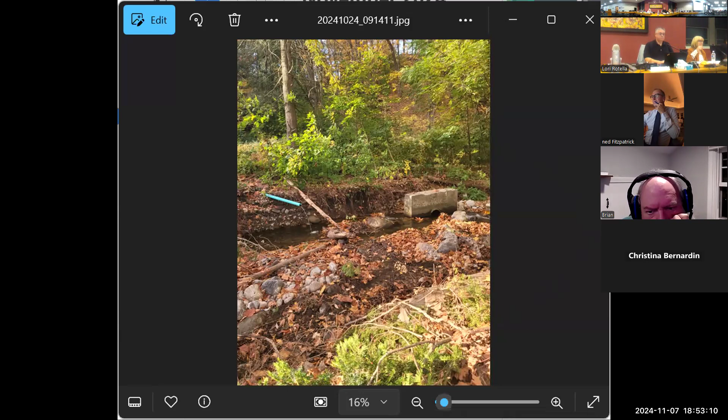Item 6 is correspondence, and it doesn't look like we really - well, we have a couple of letters, but that's it - those will be marked down.

Item 7, the WIP report: application IW 20-08, commercial development at 0 Prospect Street, applicant is Magdi Babawi on Squadros. I don't believe he's back in the country yet. Okay, we'll just keep that on the agenda.

Application IWAA 23-03 for addition located at 707-709 Rubber Avenue, applicant is Dion Xavier. Talked to him today, they're still working on the inside.

They have electrical and insulation to do, and they also need to redo some of the outside stairs and replace some of the siding. So they're keeping the silt fence up. Okay, we'll just keep that on.

Application IW 2307 for a pedestrian walkway over Fulling Mill Brook, located at 0 Prospect Street, account 060-7050, and 47 Prospect Street. The applicant is P&M Property Management. No change yet, I've talked to him several times a month to ask when he'll do the work. He didn't give an estimate or a date, so I'll try to get one, and we can wait on the agenda if we don't need it yet.

Item D, commission discussion and decision regarding application IW 2404 for a self-reported violation of permit IW 1408, located at 1419 New Haven Road. The applicant is Kyle Pustula and Associated Consulting Engineers.

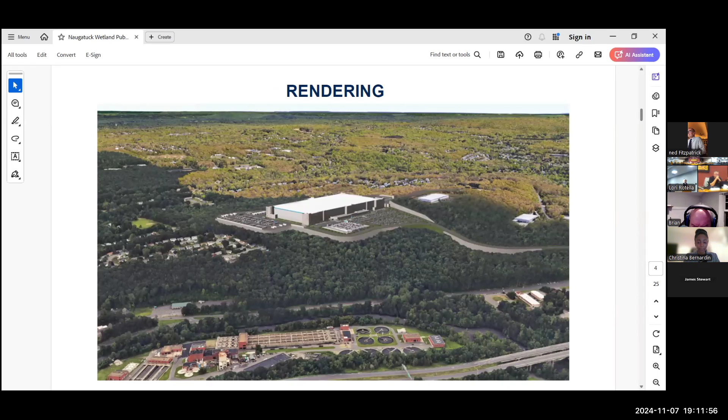So quick rendering for those who haven't seen it in previous meetings. This is just a rendered view, bird's eye view of what the building will look like once it is constructed and where it will kind of sit in the overall area. Next slide. So what is the building?

The building is a retail distribution facility. We consider it, and Amazon considers it, a first mile distribution facility. First mile is basically the first time product comes into a building and gets stored. So if any of you are sellers of toothpaste, you ship your toothpaste to Amazon, Amazon will store it inside this warehouse on floors 2 through 5. Then when somebody else in this room buys that toothpaste, they'll be picked, packed, and sent out of this facility to another facility via zip code.

And that will be more of a last mile or middle mile facility. Those can be another Amazon facility, similar to the one in New Haven, where you see the little trucks running around your neighborhoods delivering actual Amazon packages. It could be USPS, it could be FedEx. So there's many ways they could get their package, but this is the first mile - storage of all of their products that they sell.

This is a 24/7 operation, 365. They run 2 or 3 shifts, depending on what they decide when operations gets into the building. The building itself is a 650,000 square foot footprint on the main floor, and then there's floors 2 through 5, which is where all the goods are stored. The main floor is all packaging, shipping, picking, and then operations for the building.

The total square footage is a little over 3.2 million square feet. The building is primarily constructed of insulated metal panel at the top, which is color coded to Amazon's liking, along with insulated metal panels at the top, and precast concrete panels for the remainder of the building. Next slide, please.

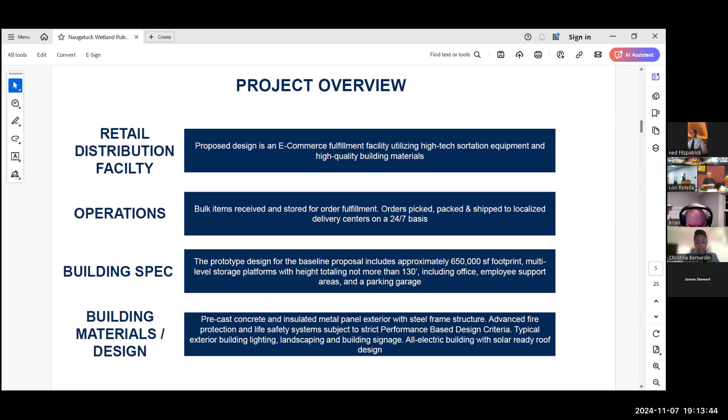Just some high level project benefits. Obviously, this is a huge building. We're developing a very large piece of land. Obviously, the building is readily assessed over $150 million in many of the municipalities we built this in. So that is an increase, obviously, to the current tax base and current use of the property.

Permanent jobs - like I said, it's a 365 facility, 24/7. There are estimated to be between 500 and 1,000 permanent jobs within the facility once they are open and running kind of full steam. We generally believe it's a little more, but like to be conservative in what we put out into the public forum.

Construction jobs, have a lot of union fellows in the building tonight. Thank you for your attendance and support. As many of these big jobs, a lot of union participation on all these buildings.

My job up in Rhode Island was 90 some odd percent union, and we had probably 70 to 80% union in Charlton, Mass. So a lot of union participation, a lot of construction jobs, 300 plus construction jobs during the project, and on a peak day in the middle of the project when we're running full bore, there'll be 400 to 500 people on site every day working.

It'll be hard to notice when you're in the building or when you're on the site, but it's a tremendous amount of people. Other benefits, obviously, is all of the construction workers, all of the subs to the subs, are all in your community and going to your mom and pop shops, eating at your pizzerias, going to the gas stations. So other avenues outside of the construction field obviously get helped and see economic impact in the positive.

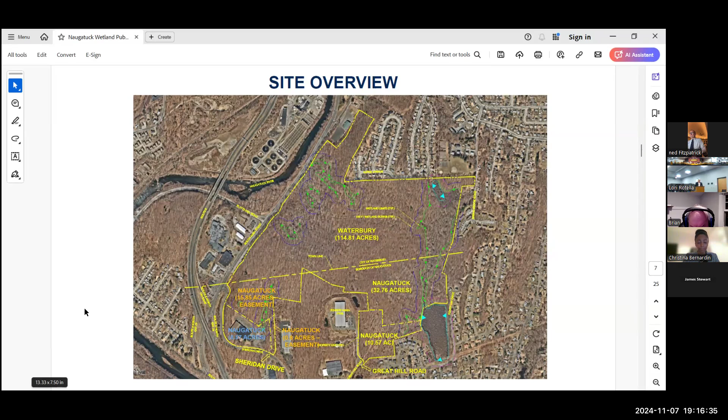Go to the next slide, please. If you've had a chance to review any of the materials that we submitted, this is the overall site plan. It expands on some of the commentary you've heard about the building. It is supported with surface parking as well as a parking deck.

The parking deck is fully located in Waterbury, and about 100 of the 1,000 parking spaces are located south of the line in the borough. Two driveways on the map: one on the left-hand side connects to Sheridan, and one on the right-hand side connects to Great Hill Road.

Dean Gustafson, with All Points, will walk you through the various wetlands that exist on the property and surround us. But I'll take you through some of the engineering on the grand scale of the project and how we came to the design that we concluded with and have submitted as part of the application.

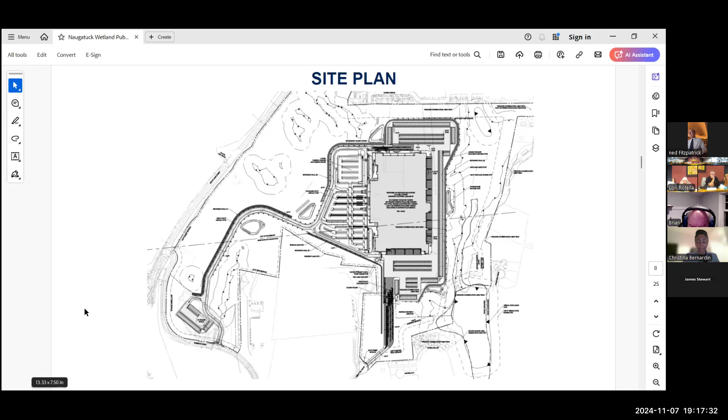Next slide, please. So a big part of what we've spent a lot of time on to date, in addition to the layout, orientation of the building, design of retaining walls, grading, and some of the other materials in the package, is stormwater management—one of the key components we spend a lot of time on as part of the inland wetland application.

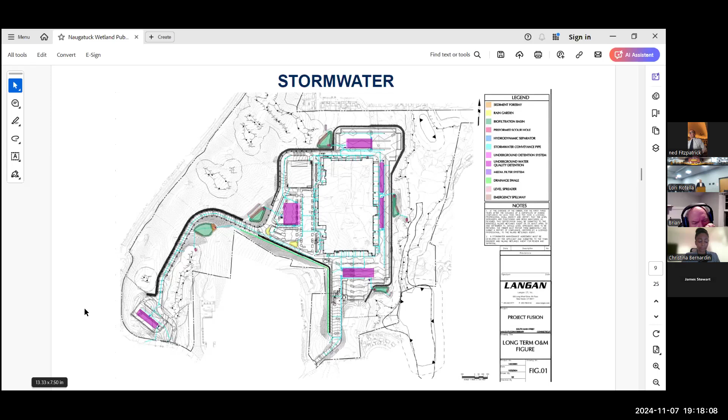Next slide, please. And I'll highlight those in a treatment train, because that's really how these systems work on site. It isn't a singular component that captures and treats stormwater. There are a number of features that move in sequential order from the drop of rainfall to the actual discharge off site.

So the first step in that stormwater management is catch basins. Those catch basins convey water through a pipe network. The first stop in renovating and cleaning that stormwater is a hydrodynamic separator, basically a swirl chamber that allows materials that float to be trapped at the top, and heavy materials like sand and dirt and rocks to fall out of the water and be captured in the chamber.

As that water leaves that initial round of treatment, it goes to an underground detention system where we're actually able to meter the rate at which water leaves the site and leaves the individual components. This is kind of unique, and really a function of the new Connecticut Stormwater Manual, which I believe went live in July of 2024—we have filter media that will actually filter the water as it leaves that underground detention system before it continues to move downstream.

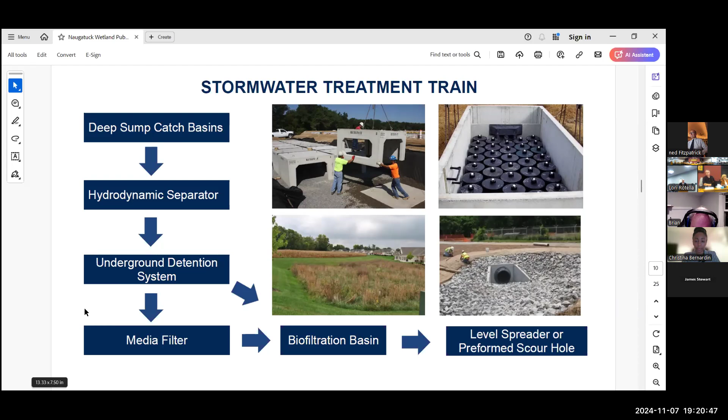One thing we are asking for as part of the application is a waiver to one component of the Connecticut Stormwater Manual. If you've had a chance to read the peer review letter by Tighe & Bond, the first bullet here was raised and discussed, and my office and your peer reviewer went back and forth on this. I thought it was important to bring up while we're talking about stormwater.

The new Connecticut Stormwater Manual has 4 standards that they look for as part of a development project. One is runoff volume and pollution reduction. All of those things I talked about on the previous slide regarding detention, the filters, the basins, that's how we meet that first standard.

The second standard is stormwater runoff quantity control, which is this slide. It has 6 or 7 components in it. The one with the X next to it at the top is the one we're not able to meet fully, and we have a number of reasons why. Every other item under this standard, we're able to meet: 10-year control, 100-year control, beyond 100-year control, conveyance protection, emergency outlet sizing. We're able to hit all those, but that first one, as part of this submission, we are requesting a waiver.

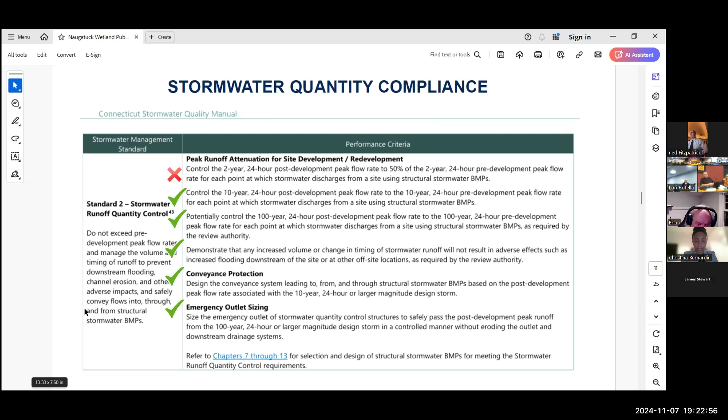On the next slide, I'll highlight it and give you a little background. The standard we're asking for a waiver on is the new stormwater manual requirement that 2-year storm events be reduced to 50% of the pre-development rate. A normal standard in most design criteria is that you match or reduce what happens existing with your proposed project. This asterisk we're asking about is a new requirement for taking the 2-year storm and actually cutting it in half.

That standard did exist in the prior version of the Connecticut Stormwater Manual, but it was really focused on sites where you had a direct discharge to a stream, and they wanted development projects to try and minimize the flashiness and the blast of water that would come through a stream in some smaller storms. That's been rolled into this second standard completely.

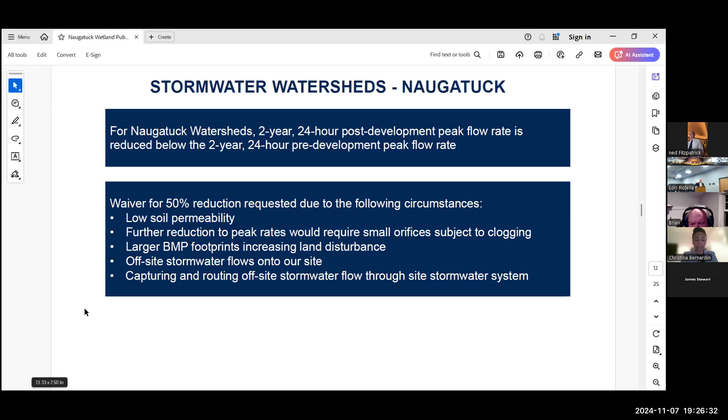This is really one of the biggest driving forces. We have about 86 acres of land in Naugatuck on the property, and this other 40 acres contributes to that stormwater management system. I wanted to flag that now—it is discussed in the peer review letter. Not sure if staff will have a chance to discuss the dialogue we've had on it, but I thought it was important to raise now and walk through some of the specifics of how we came to the conclusions we made as part of the discussion with your peer reviewer.

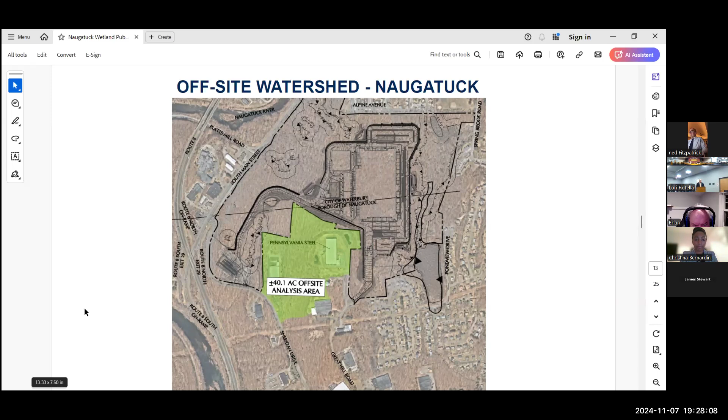Let's see, next slide please.

Another major component of the application is a soil erosion and sediment control plan. As part of the drawing set, we've included a three-phase approach: identifying appropriate measures for when work starts and clearing and earthwork begin, since day one of a construction site is very different from when it's paved and final stormwater features are complete. The first phase covers how to properly protect on- and off-site resources while initial work starts. The second phase covers when earthwork or initial clearing is done and retaining walls are being built and the site is being leveled. The third phase covers when walls are complete, paving has begun, and catch basins are installed—identifying how to modify the soil erosion and sediment control measures along that path to protect the resources.

So that first bullet is the phased soil erosion and sediment control plan, which is in your packet. The second bullet is that, in addition to everything we do locally with Naugatuck and Waterbury, because the project involves more than 5 acres of disturbance, we're required to secure a construction activities general permit from Connecticut DEEP.

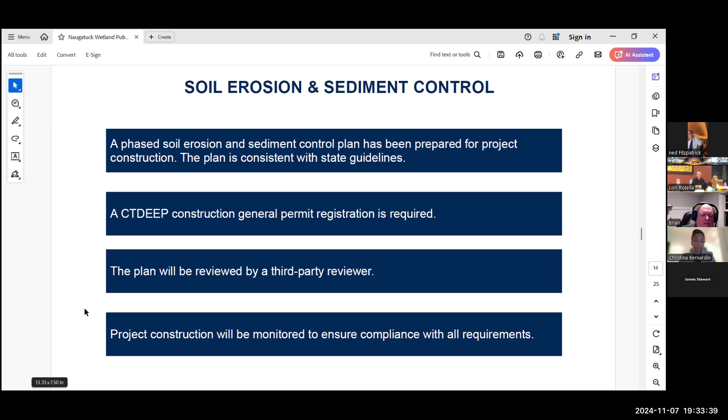Good evening, my name is Dean Gustafson. I'm a senior wetland scientist, professional soil scientist with All Points Technology, Waterford, Connecticut. Next slide please. So what I'm going to discuss tonight, all the information is contained in the wetland assessment report that's been issued as part of the wetland permit application. We'll talk about the wetlands themselves, the project's regulated activities, and our extensive mitigation plan that we're proposing to offset some of the minor regulated activities.

So on this particular slide, what we're showing here is the wetlands that we delineated back in 2022 and then updated that mapping this past spring. Those wetland areas are shown as a shaded green area, and surrounding those wetland areas is a darker green dash line that represents the 100-foot upland review area that's regulated by your commission.

There are four wetlands that are located within the borough of Naugatuck. Starting from the far western end, there's a small isolated wetland that we identify as wetland 10. Next to that one, just to the east, on the parcel identified as 191 Sheridan Drive, is a narrow linear wetland feature that drains to the south, identified as wetland 7, that drains through a culvert system underneath Sheridan Drive. And then on the far eastern end of the site is a large wetland complex identified as wetland 8/9. And at the far southern end of that wetland system...

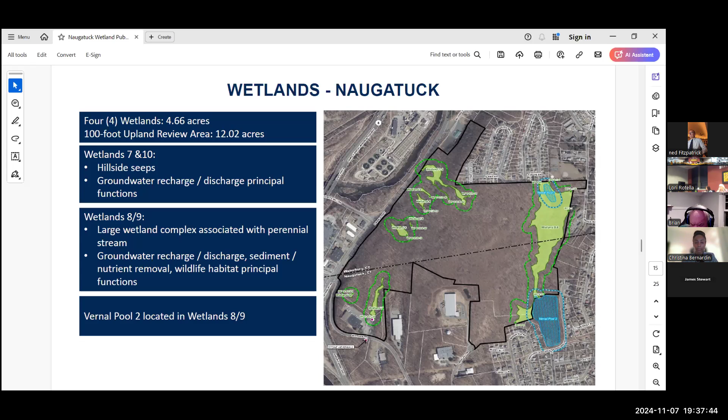I misspoke — this feature we identify as vernal pool 2. Vernal pool 1 is not located in Naugatuck to the north, in Waterbury. Next slide, please.

The property was also evaluated for state and federal listed rare species and found not to contain any threatened or endangered classified species. Through consultation with the Connecticut Department of Energy and Environmental Protection's Natural Diversity Database, it was determined there was a potential for two state-listed special concern species, with records in the vicinity but not on the actual property. As a conservative evaluation, we assessed the site for possible presence of eastern box turtle and Horace's dusky wing. For the dusky wing, we surveyed the site for host plants utilized by that species, primarily oaks, dogbane, buttonbush, and goldenrod.

The turtle evaluation survey was conducted by one of the leading herpetologist experts in the state, over a series of 3 days in June of 2022. No box turtles were identified as part of that survey work. We did identify various host plants, which are fairly common species in this type of community, the mesic and dry-mesic forest habitat, both within the proposed project limits and in extensive areas outside the project's limits of disturbance, scattered across the north, south, east, and west areas of the site that will remain unaltered.

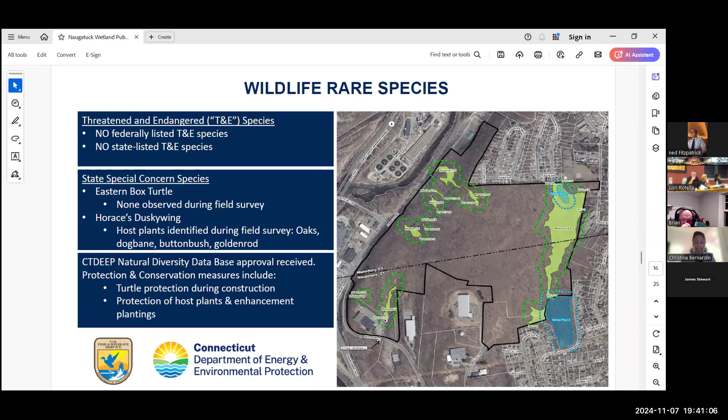We also evaluated the property for potential historic and archaeological resources through various investigations and consultations with the State Historic Preservation Office, or SHPO. A couple of different surveys were performed throughout the property, and the heritage consultant did not find any resources eligible for National Register listing. Those results and conclusions were submitted to the SHPO office for review, and SHPO agreed that the proposed project would not have an adverse effect on historic and archaeological resources. A letter to that effect is provided in Attachment E of the wetland assessment report.

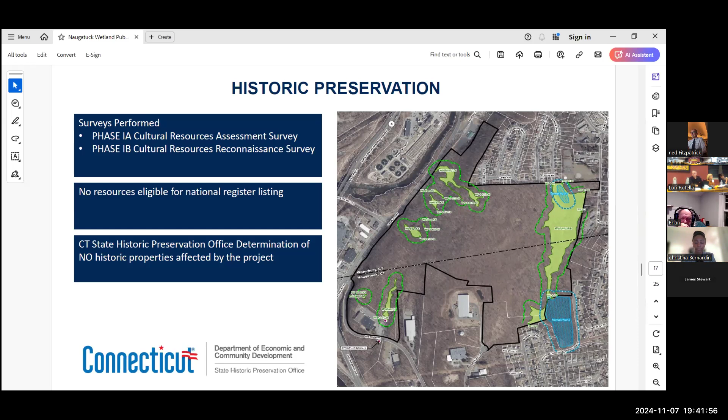The next few slides will start talking about proposed activities of the project located within the regulated areas under the purview of this commission. The proposed project has been successfully designed to avoid any wetland impacts — there are zero wetland impacts for this project. Also, encroachment into the 100-foot upland review area has been minimized through engineering controls, namely extensive use of retaining walls that limit the extent of the project's limit of disturbance.

This slide shows a total of 5 areas with regulated activities, essentially small encroachments into the upland review area: a little area just east of wetland 10; areas just north and south of wetland 7; areas at wetland 8 and 9; a small area associated with a basin; and a small area associated with a retaining wall in that location.

So what's shown on this map, those pink or red shaded areas are the areas of encroachment to the 100-foot upland review area. In total, there's a little more than 9/10 of an acre of encroachment into the upland review area. Many of those areas are on the outer limits of the upland review area. When you consider that there's a total of over 12 acres of upland review area within Naugatuck on this project, the project represents less than 8% of activity within that upland review area.

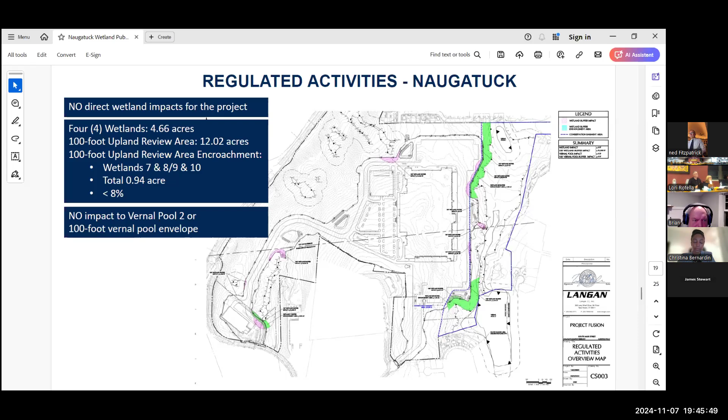We'll get into a little bit more detailed discussion of where these encroachments are into the upland review area. We'll start with wetland 10. There's a small strip right here - this line represents limit of disturbance associated with one of the proposed access roads. That is a temporary disturbance, mainly to allow for installation of appropriate erosion sedimentation controls. So that's not a permanent impact there, it's fairly minor in nature.

For wetlands, this is wetland 7. At the north end, there's a stormwater biofiltration basin, and an outfall structure that will discharge to the north of wetland 7, helping feed and maintain the hydrology feeding that wetland system. That's again more of a temporary feature, required to get the treated stormwater to that location and maintain the hydrology of that wetland system.

For the south end, we have a bit different situation. This is essentially right at the tail end where there's a head wall with dual culverts discharging into an underground system that eventually discharges under Sheridan Drive. There's existing paved access and a paved parking area associated with that existing vacant industrial building. So a lot of that shaded area is existing pavement that'll get replaced with pavement. That's obviously a permanent impact, but it's an existing impact and disturbance.

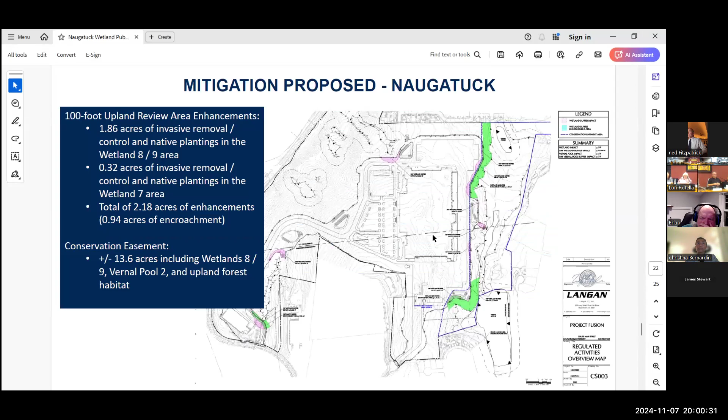All right, here's one. These two slides show kind of the detailed areas of our encroachment into the upland review area. So overall for the project, I think this is probably our closest point, at the southern end of wetland 7. But as I indicated, it's existing paved access and paved parking lot, and we're actually retracting that limit of pavement. So we do have some work that's fairly close to the wetland edge, because the pavement is probably less than 10 feet from the edge of wetland.

I think that's what we saw when I went out and did a site walk a couple weeks ago with Matt. I just wanted to make sure I understood where it was. So it's behind the fence where we were let in? Yes, there. Okay, great. And Tim's telling me we're actually moving it 25 feet away, so we're retracting the existing edge of pavement 25 feet further away from the wetlands.

So that's obviously a regulated activity, but it's an enhancement, an improvement. So it's an existing permanent disturbance and you're enhancing the area. That's correct. Okay, and then there was another area, was it the parking lot that's close?

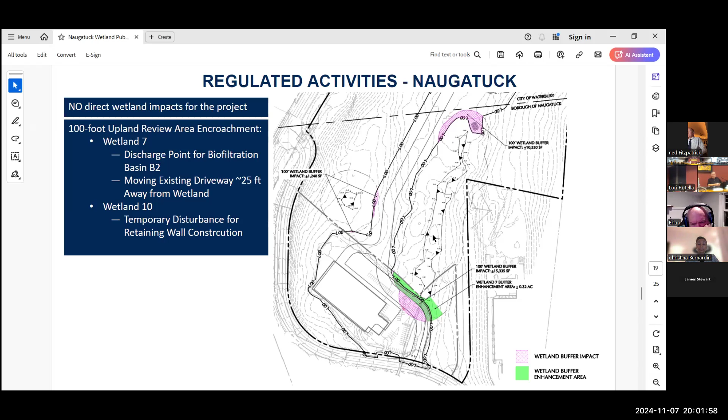So there's, you can go to the next slide. It's not in the wetland area, but it's within the 100-foot review. That's correct. Yep, so this edge of the retaining wall, we're just clipping the outer limits.

So maybe we're 75 feet or so away from the wetland edge at the closest point. Okay, got it. For this basin, we have just a small area - it's difficult to see here because the shading is so thin.

There's a small area that clips there, part of the grading of the basin, but that's on the very outer limits of the upland review area. And with regards to the vernal pool, there's no disturbance at all, even during construction, within 100 feet of the vernal pool? That's correct. This line work here is the limits for large vernal pool 2, which is mainly off-site, but there's a small section that encroaches into the project, and some right along the property boundary.

So there's no construction activities in that vernal pool or within 100 feet. How close do you get to the vernal pool, do you know? So it would be this outfall - we're just outside of our 100 foot right there. So it's about 100... well, that's because the wetland boundary and the vernal pool boundary in this location are coincident. So it's 110 feet, give or take.

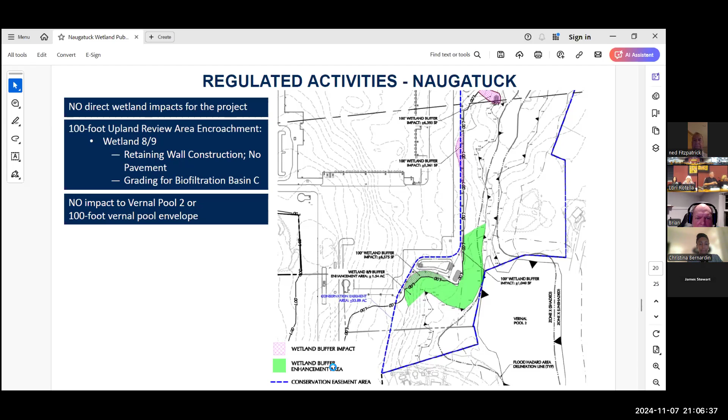Well, the 2024 stormwater manual, this version came out, I believe it's effective the end of March of this year. There's no reportable decision on that issue that I'm aware of. I believe the commission would have the authority, and I believe DEEP allows the commission to waive provisions of that manual in the event there are appropriate circumstances presented by the applicant. In this case, the way I heard the explanation, from not just the applicant but from our own independent reviewer, it was an appropriate request based on the site and soil conditions of the property. So there is, I believe, a sufficient basis in the record if the commission chooses to make that decision.

Thank you. And by the way, it's a decision by the commission, but it should be based on some scientific evidence in the record, and I believe that scientific evidence is before you.

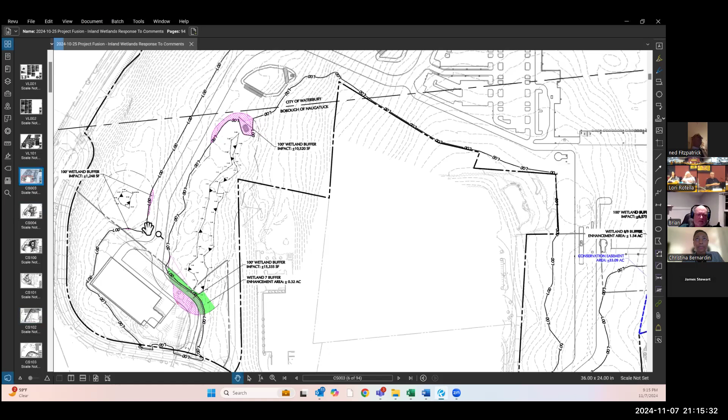Jim, are you driving the slides or is Christina? Christina. I am. Hi, Tom Durgo again, professional engineer, Langan. So...

I can say definitively that there will be no blasting in any of the areas where we have encroachment into the upland review area. Our blasting, and as your borough engineer mentioned, the locations where we have retaining walls, that's where we're elevating grade above existing grade. The place where the opposite of that happens is really in the middle of the site here.

On our grading and drainage plans, you'll see a retaining wall that runs right to the north of the Pennsylvania Steel property. That is a rock face that will be cut. So the perimeter walls are all fill to elevate grade. That face will be, we're lowering existing grade, but there's a property to the south of us that will remain high.

So we have a geotechnical engineer on the team. They've done a number of borings, they've done soundings, and they've identified where those rock surfaces are. So blasting is here, and the exact limits, we would have to do some analysis to draw the lines.

But it is not here, it is not here, it is not here, and it is not here. It's really focused on the high point of the site that will be lowered to create this section of the building, this section of the parking lot. And then as we move north, we begin to fill on existing grade. That's the reason on the grading and drainage plan you see retaining walls that come around these sides.

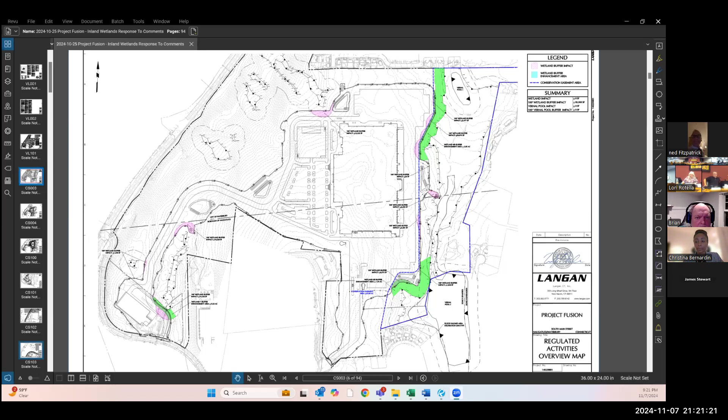I think we had our question answered about the blasting, so we could put a dust control plan in place to protect the wetlands. And it looks like we got our question answered regarding the waiver, that we do have the authority to grant that if desired by the commission. I don't think there's anything else. Is there anything else we'd need to meet again next month on for that?

Maybe we could close out the public hearing and perhaps make a decision. We could work on a motion next month as well, because there's still a lot for us to absorb on this. I want to thank the applicants for their information, and I want to thank the public for your comments, it's been very helpful. We do appreciate everyone's cooperation.

Are we in agreement we can close out the public hearing? Brian, you good with closing out the public hearing? Yep. Ned, there's no issues with that? No, you're allowed to close the public hearing, just make sure the applicant is aware that there should be no further information provided to the commission after the hearing is closed. The public should be aware of that too.